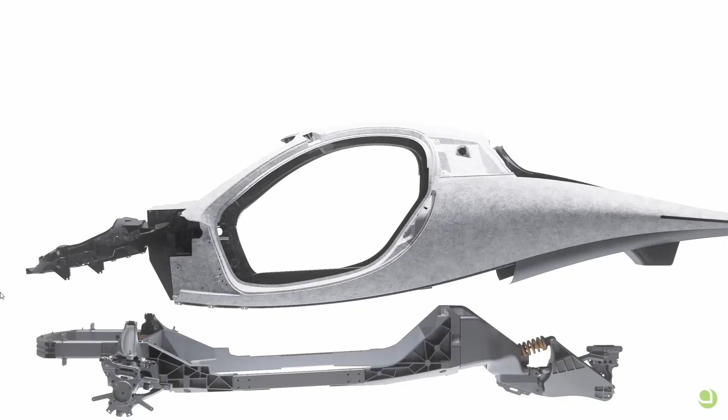Okay, so this is where the animation starts. You can see that it is a body on frame assembly. There's a frame, I believe this is all metal—that was the impression I got from Jason Hill when I was talking to him, although he didn't come out directly and say it. This is probably all cast aluminum. And then the spiders for attaching the hub motors, here they are. I think these arms are just for holding the wheel covers, because they're not necessary for holding the hub motors—you don't see it in the rear part.

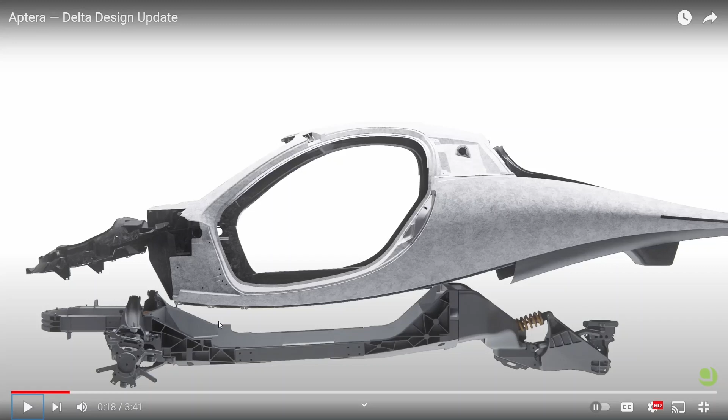Sarah said that they're going to show us a digital design by the end of the year. So here's my impression, tell me if you guys agree or not: I think they're not done with Delta. I think they're done with the exterior, but not with all the mechanical parts and the inside, and I don't think they're going to be ready for a little while longer. But the exterior is finalized, and they're going to show us that by the end of the year, hopefully.

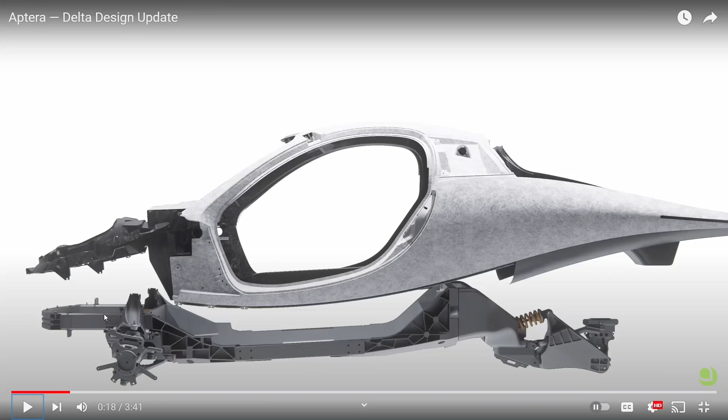Let's shift back here a little bit. If you saw my videos of my interview with Jason, you see a bottom-up view of this frame, and this is actually a big oval here—it's hollow in the middle, and the battery pack sits in here and is bolted into this thing. When we first heard it was a structural battery pack, the impression was that the rear suspension would bolt onto the battery pack, and the front suspension would bolt onto it too. That turns out not to be the case. There's an actual metal structure that holds everything together, and the battery pack is likely bolted into this structure, probably adding structural rigidity, but it's not like the battery pack alone spans between the two sides—there is this metal frame.

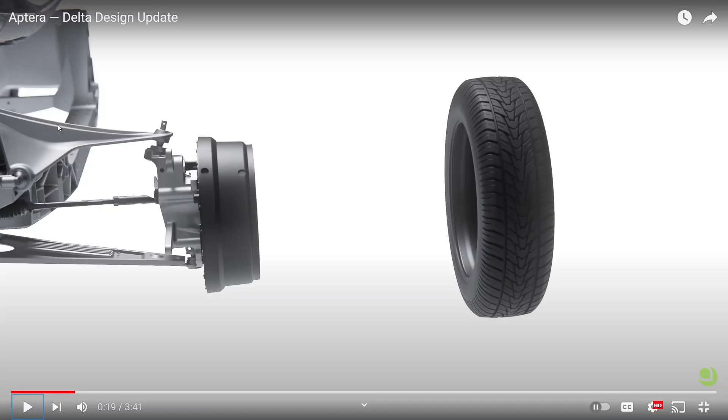Okay, let's step through this slowly. You see the hub motor being attached to the spider in the front. Here's the comment I made in a previous video about how the upper control arm is a little different—it's not smooth and aerodynamic, it has this ridge along here, whereas the bottom is fairly aerodynamic and thin. I suspect the ridge is to increase rigidity in the vertical plane. It looks like it may be a stamped piece rather than forged, but these parts do kind of look forged. Anyway, this design is different than what they had on the beta models, where it was a more aerodynamic control arm. I don't know if they decided this was good enough since only a small portion is exposed to the wind, or if they're going to put some kind of cover on it to make it more aerodynamic. But there is this ridge, and there will be some turbulence of the air around it.

The high voltage cables to the hub motor are probably routed along the lower control arm, as in the gamma. Go ahead and look at the gamma ones, and you'll see that the gamma upper control arm is different.

And you can see here, this is the fiberglass SMC, it has this look to it. And here you can see the shocks for the front suspension. In the previous view, it looked like maybe the shocks were going to be mounted transversely, but no, it looks like they're mounted mostly vertically here.

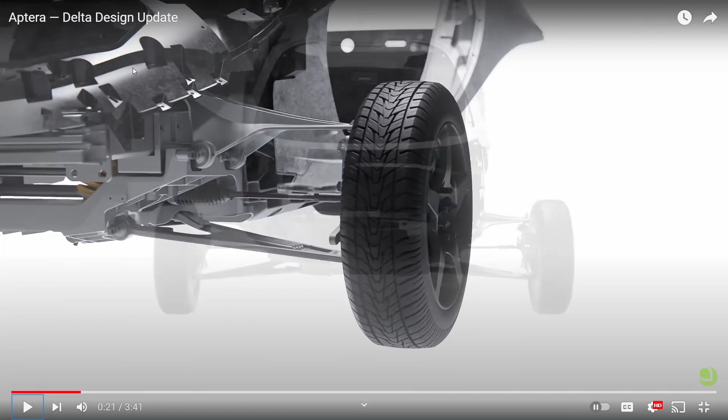Okay, so now the wheel pants are coming in, and what's odd is they said in the webinar that there would be no frunk, but it looks like there'd be a lot of space for one. I suspect this little port here is the air channel for the air intake, cooling the cabin and the battery pack. And here's the wheel pants coming in, which look like they're made of fiberglass SMC, which would make sense. These are supposed to be EVA foam, and I don't know if that's still the case, but I don't know why it wouldn't be. That was their design before.

Okay, so there's the windshield coming in.

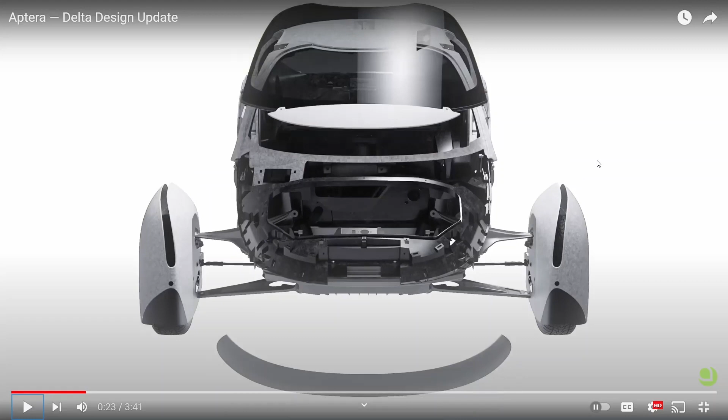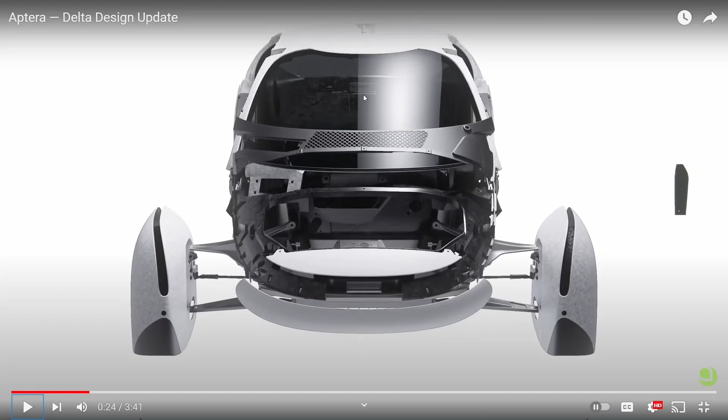This is the front of the nose cone, and you see there's no logo on it anymore. Here's the cowl, and here's the place for the ventilation to come in. Basically it comes in over here, and I think the air gets sucked down through this and goes in here. I believe this is the attachment for the single windshield wiper that'll go across. When the hood goes onto this, it forms a little lip that the windshield wiper fits behind, creating a low pressure vortex that pushes air into this area. So the air will passively get pushed in, or sucked in by that low pressure vortex - I guess that's the more correct term. Instead of being pushed in, it's going to be vacuumed in.

And then here's more side panels coming in. These are likely all fiberglass SMC.

You know, I'm not sure what these things are right here. I'm not entirely sure what these are. Tell me what you guys think these are in the comments below. It looks like they're going into the side someplace. And again, looks like there's plenty of room for a frunk. Here's the shocks right here. So I'm not real sure why there's no frunk here.

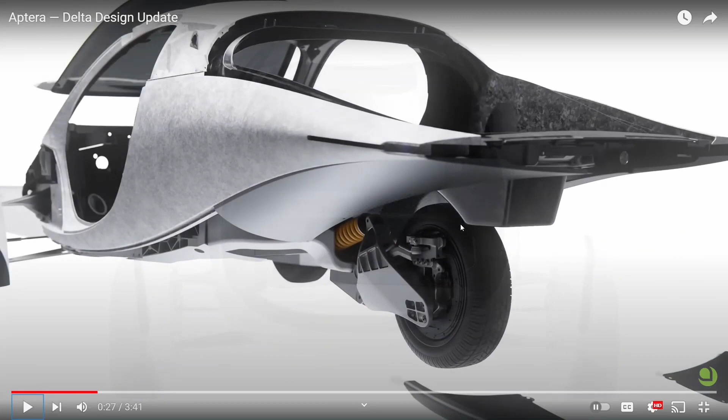So those side panels that we saw coming in, I don't think are these because these were in there before.

Okay, here's this piece, and I see this cutout right here. I believe this is the part that's metal, and this would be the cooling plate because it would go right underneath the battery pan. So I suspect this other piece is plastic or fiberglass SMC - see, it has a different look, this is the fiberglass SMC. This one looks a little different, kind of metallic, but I think it's just painted that way. I don't think this is a metal piece. I think the metal piece for the cooling panel fits into this square area right here.

Oh, and if you noticed before in this area, there's a little cavity here. I don't know what they plan on putting in here, or if this is an extra storage area. But let's go back and take a look at this, like this part right here.

You've seen across our social media channels.

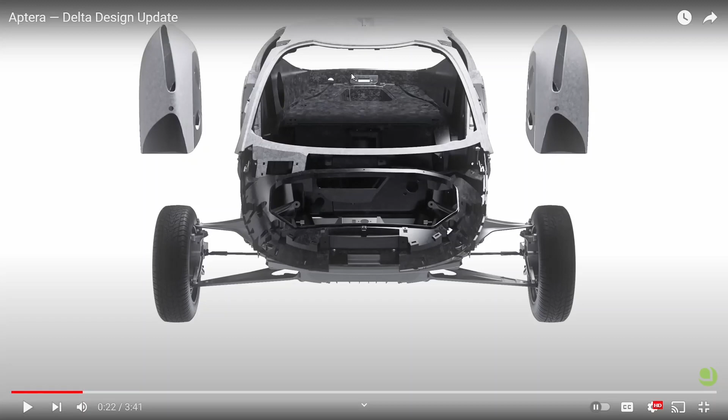Right here, see, this big part I think corresponds to that part that goes down. And it looks like this might be where the latching mechanism for the hood is. That's a little disappointing to me because I would have thought the latching mechanism would be farther back, out of the storage compartment, but it looks like maybe it's still in there. I'm not sure - tell me what you guys think this thing is right here.

Channels over the past couple of weeks.

Yeah, like I don't know what piece this is.

What is that piece? questions about our Delta design.

Maybe it was this thing, I don't know. Okay, anyway, this is where the metal piece for the cooling pan goes in, I'm pretty sure, because that's where the battery would fit in. Here's that outpouching of the storage area. I don't know what else would fit in there - I don't think any electrical component or anything would fit in there. It'd be kind of an odd place to put something.

And what it means for you and your very own Aptera.

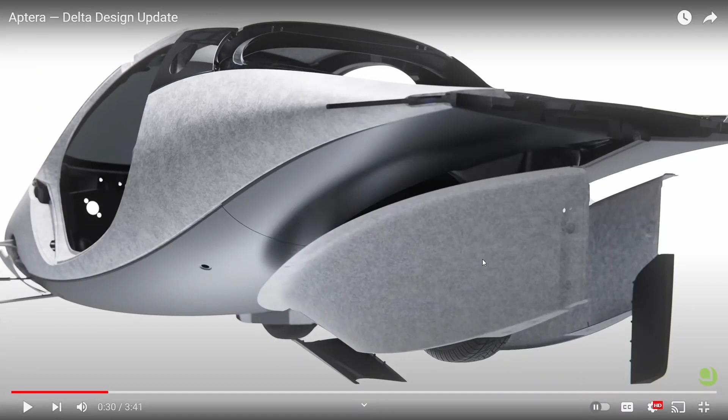So this is the rear wheel covers, and this is fiberglass SMC.

These things are the EVA foam bumpers in the front and the back.

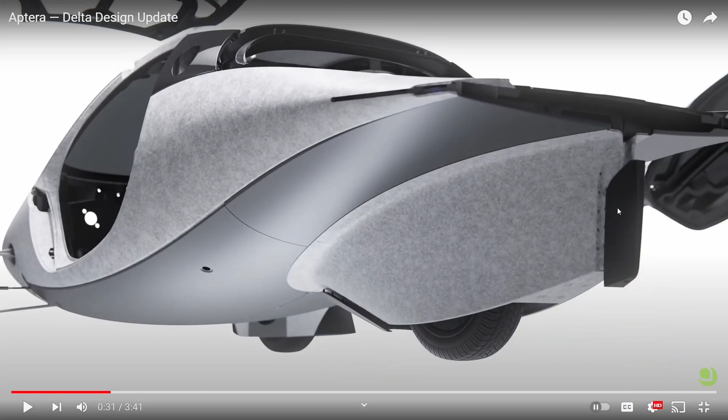Here's the hatch coming in and the front hood coming in. Okay, so here's the doors coming in, the front hood. See? Totally, there's space for a frunk. I don't know why they're not doing it.

Maybe this is where the air handling equipment goes in. I'm not sure. And that scallop piece that we saw in a previous teaser is clearly the rear hatch.

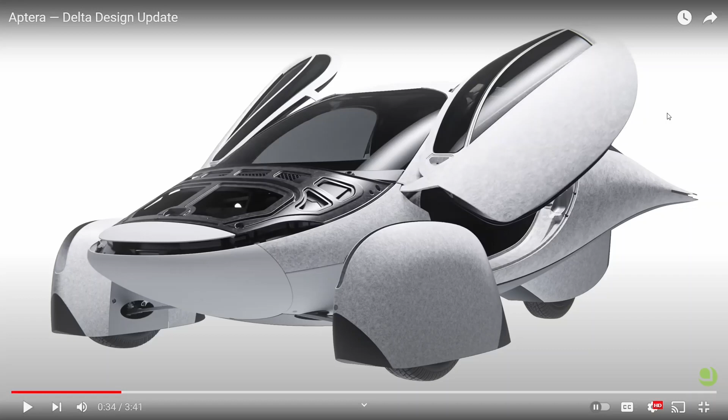So they're having a webinar in January where they're going to talk more about the details. I'm hoping that once the Delta is completely finalized, we should get answers to a lot of the questions that we have.

Like, is there a vehicle to load? What is the height of the wheel pants? Is there going to be heated seats?

Again, it looks like the UI is far away. In the ambassador webinar, they said they're not really focusing on the UI because that's something you can do until the very end. But the mechanical components are what they need to get finalized first.

Now you see here, here's the hatch, here's the hood, and there's a little lip here. And when the solar hood is on here, the wind will go like this and form a little vortex in a low pressure area, and that'll suck air down into this venting area. And I think through this port, which would go into the cabin air handler and push air down into the bottom to cool the cooling plate when there's not air movement, like when the car is stationary and charging.

To go over the design and give you the opportunity to get your questions answered. Once our design is complete and we reach our funding objectives.

Okay, so I think that's very clear. They're saying once it's complete and once they reach their funding objectives. And last we heard, their funding objective is they need $50 million in addition to what they have now.

We'll begin systems integration and Delta builds. We'll have various build types for crash testing and validation. The engineering team is excited to perform and publish real-world data on our vehicle efficiency, our range, solar output, and more using these Delta builds.

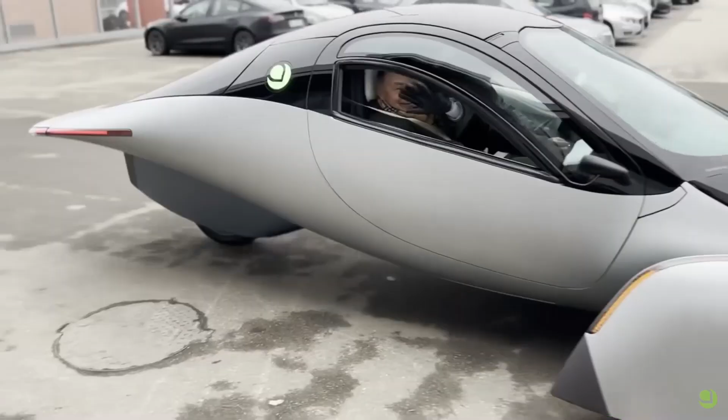So you can see the vehicle in the back here, and this will be the facility where the vehicle will be assembled. Okay, so a lot of things he said that are very interesting.

He says it's the most exciting project they've done in the past 10 years, which is probably a little bit of a superlative, but obviously they're excited. This is a company that's been working with supercars and making carbon fiber bodies for supercars, and this is the most innovative and exciting thing they've done in the past 10 years. That may be a little bit of exaggeration, but it still shows that they're excited about it, which is good.

They seem to think there's a lot of excitement in the Motor Valley about Aptera, which is good because I think there's some deep pockets in there, and perhaps they're going to find investors from that area. There's several F1 teams and supercar builders there, maybe interested in investing in this vehicle. $50 million is nothing for an F1 racing team, so that's the kind of money floating around in the Motor Valley there in Modena.

So that's exciting. Then he said this is where it will be assembled. Now, I don't think they mean this is where production is going to happen. Production is going to happen in San Diego, as far as we know, unless something has changed dramatically in the past several weeks. He also said they've been working with Aptera for a year and a half.

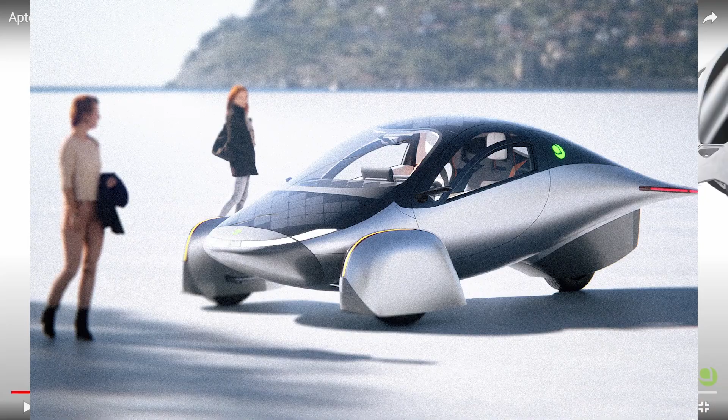I really like the two-tone look of the finalized piece that we got a glimpse of in the Q&A and the webinar with Jason Hill. I think it makes it look a lot sleeker because they did expand the interior volume of the Delta, so it looks a little bit chubby in a way, and the two-tone design slims down the look of it a lot, which I think looks great.